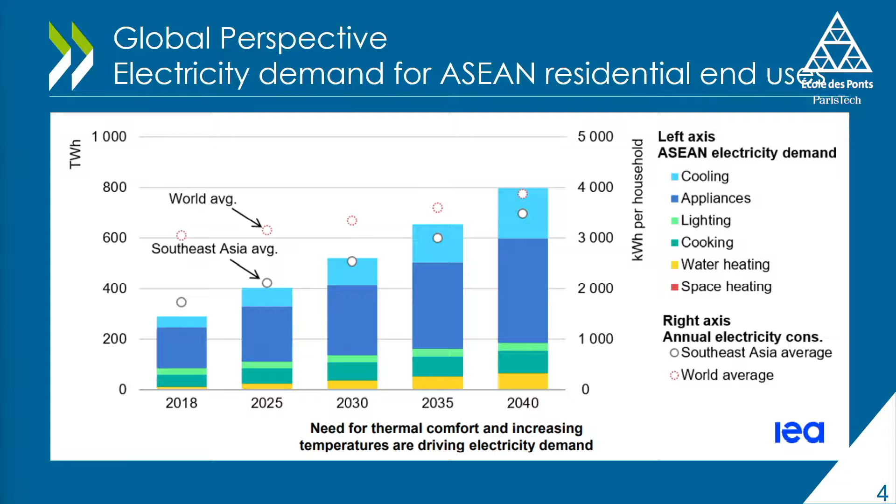So I will start to talk about Japan. This is a quiz, let me ask you a question. This is an international comparison on household energy consumption. This is the United States as the first one — red is heating, blue is air conditioning, green is hot water supply, and else. We have 4 countries here: France, Japan, UK, and Germany. Can you guess which one is France and which is Japan? Maybe — you can see 3 countries are similar, and the last one is quite different, right?

So this is the answer. European countries are similar — most of them use heating a lot. But in Japan, the total amount of consumption is not as large as European countries. You can see the difference between heating and hot water supply: Japan's heating consumption is less than 1/4 of France's, the red one. And for hot water, the green one, Japan has double that of France.

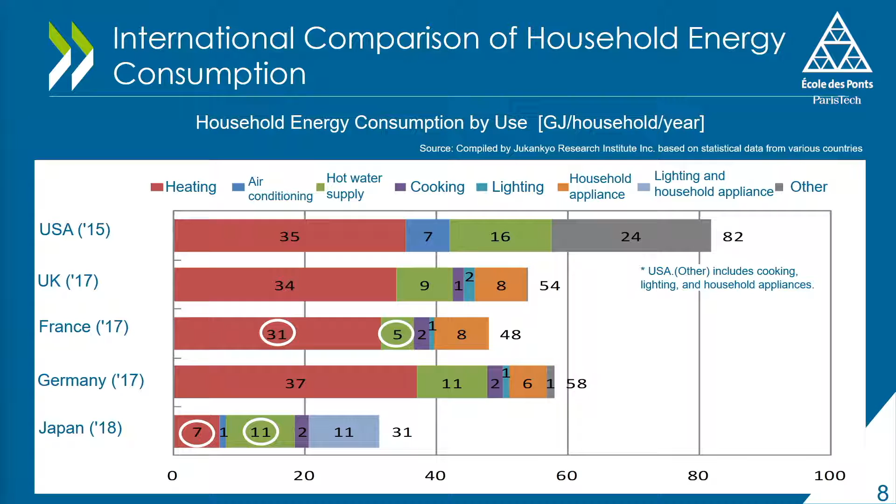Now this graph shows the difference between the regions of Japan. The top one is Hokkaido, the northern part of Japan. It's similar to Paris, so we have more than half of our consumption in heating. They use oil heating, which now we recommend them to switch to air-to-air heat pumps.

In the southernmost part of Japan, Okinawa, you can see they don't have heating. They have no orange, only the blue one, which is cooling, since they have tropical weather. In Kanto, Tokyo, we have heating in winter and cooling in summer, but you can notice the heating, the orange one, is bigger than the blue one, cooling.

Can you guess why? Let's imagine when it's 33 degrees in summer, which nowadays can go to 35, 36, or 37, but usually in Tokyo it's 33 at the highest. So we only reduce 5 degrees, from 33 to 28. But in winter, with 5 degrees, you need to increase temperature by 15 degrees to reach a comfortable temperature of 20 degrees. That's why we need a lot of energy in winter for heating.

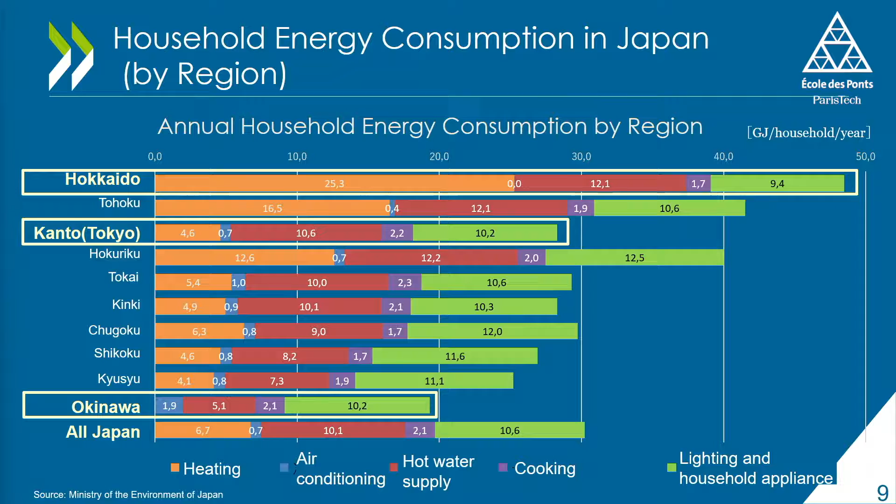As a result, we have different energy efficiency standards in Japan. We divided it into 8 regions, 4 standards. We request thick insulation in Hokkaido, the northern part, but we don't request any insulation in Okinawa's tropical weather. Instead, we request passive design, such as sun shading, in Okinawa. We welcome sunshine in Hokkaido to reduce the demand for heating, whereas we try to cut sunshine in Okinawa to reduce the demand for cooling. So passive design is totally different by region.

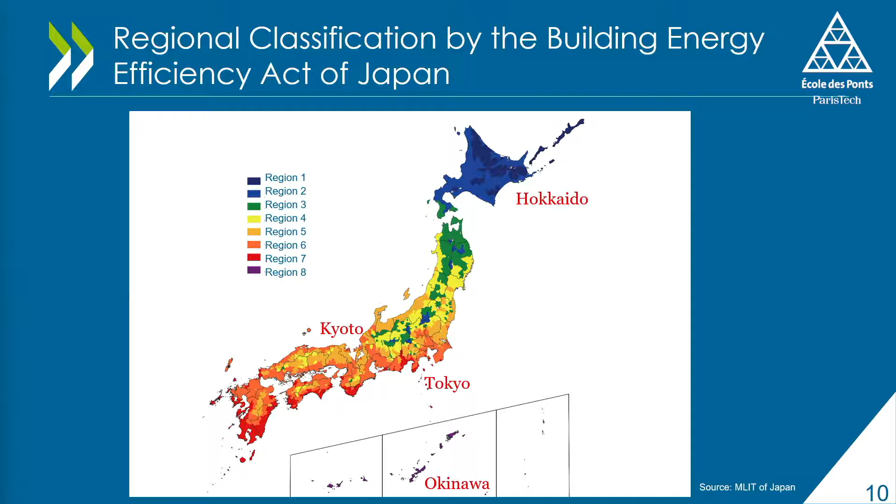So you know what happened? This is a result of poor insulation in the southern part of Japan. In some parts of Japan, the indoor temperature in winter is below 14 degrees. The World Health Organization recommends above 18 degrees for our health, but we have a lot of regions below 18 degrees in winter.

I have a friend in Hokkaido, the northern part, with an insulated home. He sometimes eats ice cream at home wearing a t-shirt in winter. But we don't do that in other regions of Japan, because they don't have insulation.

This is not only the result of the standards, since it's not mandatory for housing in Japan yet. A few decades ago, in the 60s and 70s, traditionally Japanese houses were designed for summer, avoiding high humidity, not designed for winter. Now we want to change it. They have no insulation and no airtightness, since they were built in old days. We know we need to improve this situation. Insulation is important not only for climate change and energy saving, but also for our health.

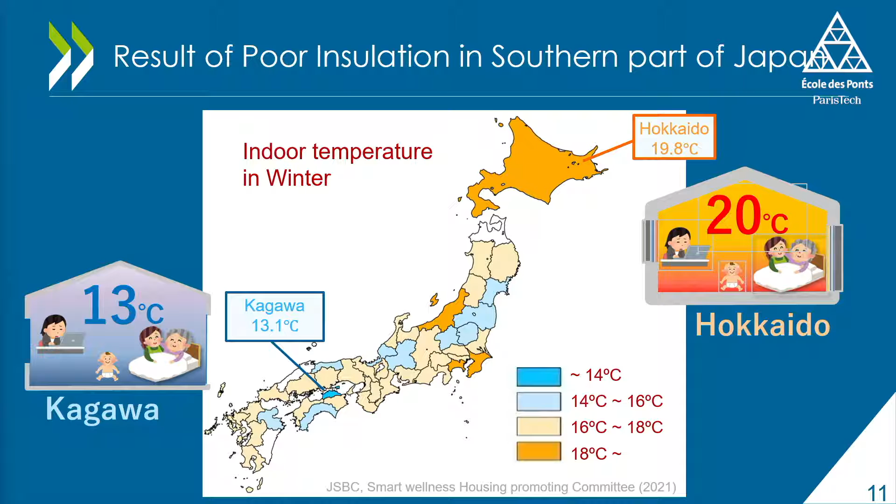Now we have talked about the household sector, so let's compare with other trends and sectors in Japan. This is a trend in final energy consumption. The total proportion of commercial and household sectors was 25% in 1990, but now it's above 30%. When you see the growth rate from 1990 to 2019, the commercial and household sectors are the only ones increasing. So we believe there is huge potential for reduction in the building sectors in Japan.

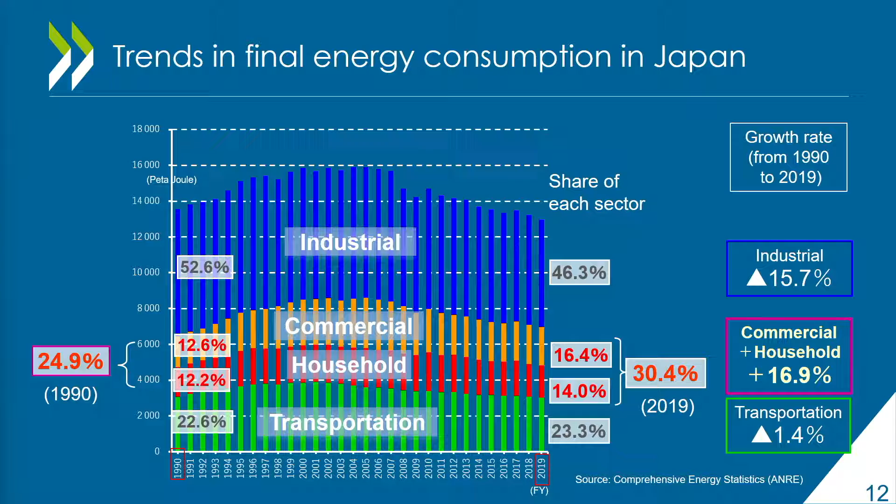So, what are our goals? Japan submitted GHG emission reduction goals as NDC, nationally determined contribution, last October: minus 46% by 2030 and net zero by 2050. But we all know these goals are not enough if we want to achieve the 1.5 degrees as IPCC reported. We need more effort.

Regarding carbon neutral goals by 2050, 785 local government units already committed to carbon neutrality by 2050, which is 40% of the total local governments of 1,800. This is a good sign since local government is a key driver for implementing decarbonized buildings. We need to promote much more cities and regions to commit to carbon neutral by 2050.

So let's go to the next challenges. To achieve the national goals, we need to promote net zero energy houses for the building sector. A net zero energy house in Japan is defined as a house in which energy consumption per year is 0 or less on a net basis. It requires high envelope insulation, high efficiency equipment, and also energy creation.

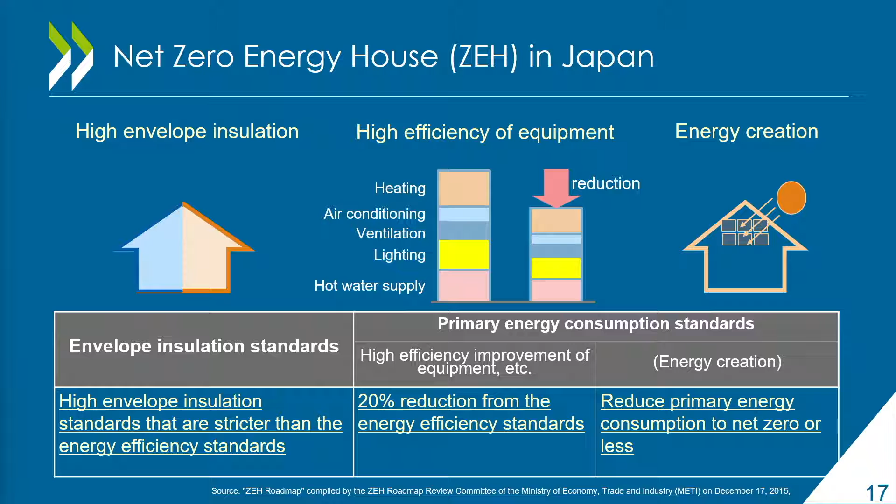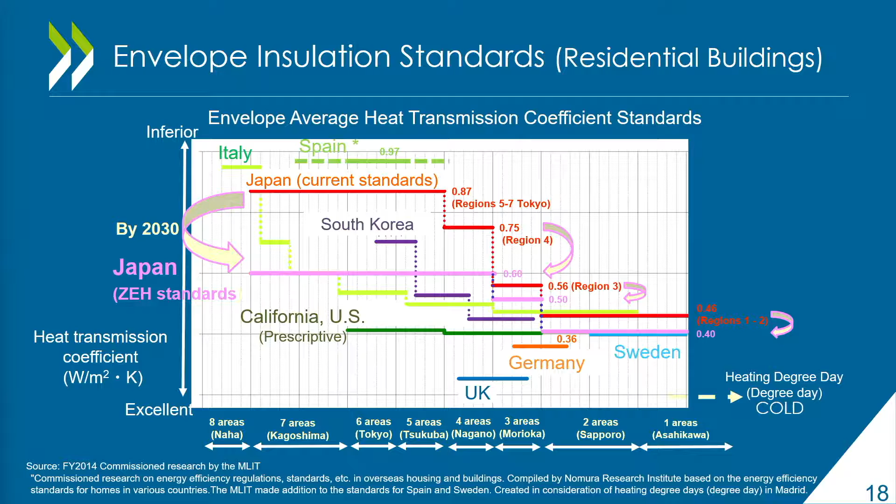We also have a lot of detached small houses in Japan, but each house's consumption is not big. Still, if you sum it up, it will be big.

I'll talk about my experience. Seven years ago, when I was in charge of making a new law to mandate non-residential buildings, there was huge resistance by architects and small construction companies to making it mandatory for residential buildings. So we could only target the non-residential buildings.

But now the situation has totally changed, and it became crucial to make all newly constructed buildings mandatory to achieve our goals by 2030. So we decided to expand the target to all buildings, including detached houses, to comply with the standards.

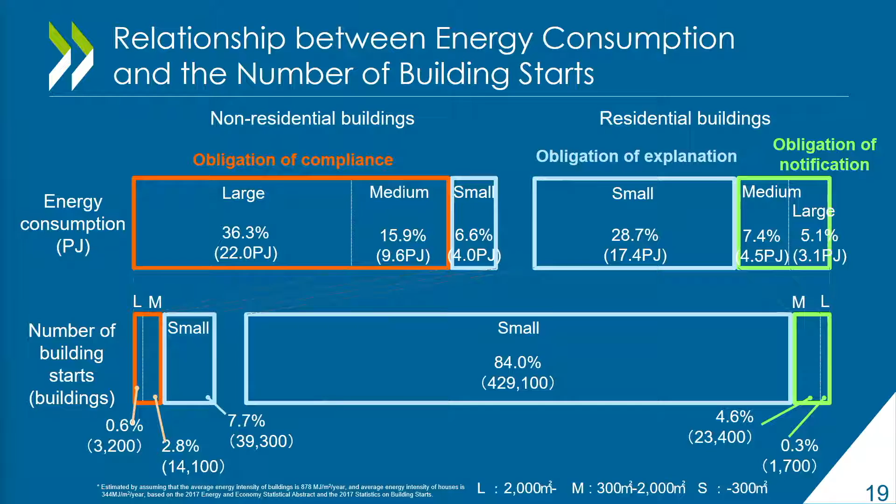For these old buildings without earthquake resistance, it's quite difficult to renovate, so the realistic way is rebuilding, in order to improve seismic performance. But for other buildings constructed in the 80s and 90s, we need to renovate for insulation.

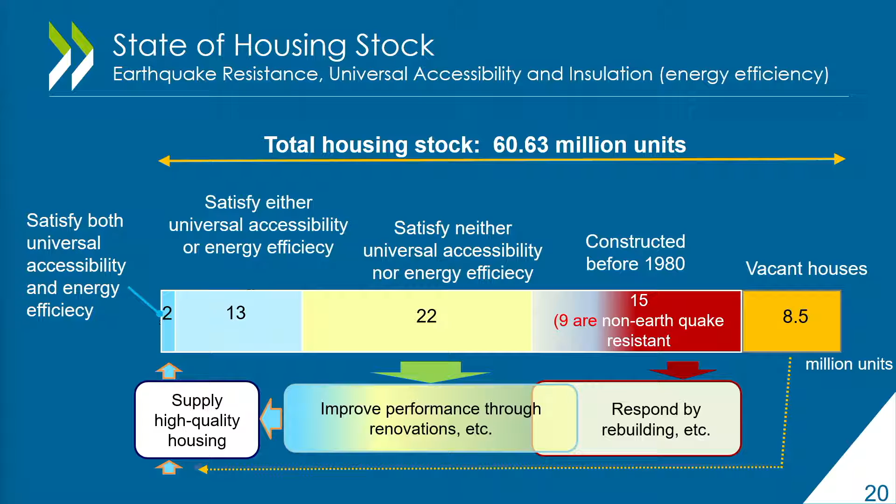So how do we tackle these challenges? I would like to share our strategies and measures.

For newly built buildings, by 2025 the standard will be mandated for homes and small buildings. And by 2030, zero energy building standard for newly built, with PVs to be installed in 60% of newly built detached houses.

We also have a target for the usage of timber. To expand the use of timber as a carbon sink, we will promote efforts to transition to wooden and wood-based construction. Most detached houses in Japan are already wooden, but for non-residential buildings it's not, so we try to make it wooden.

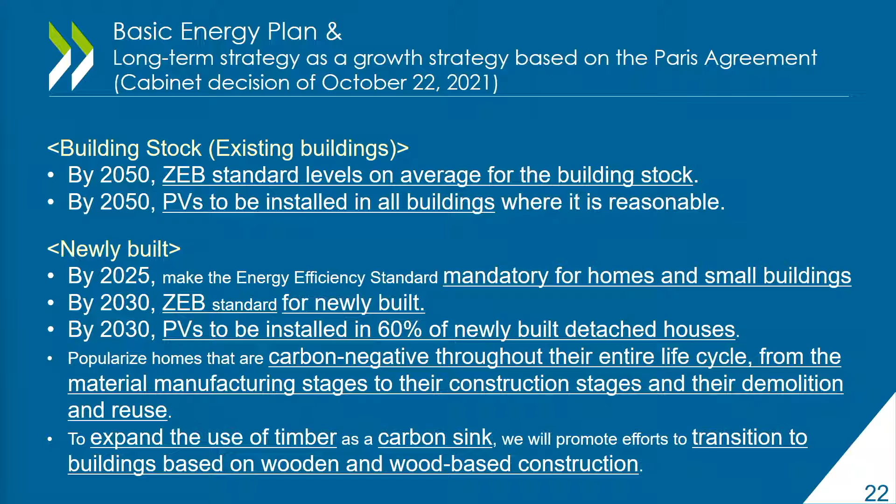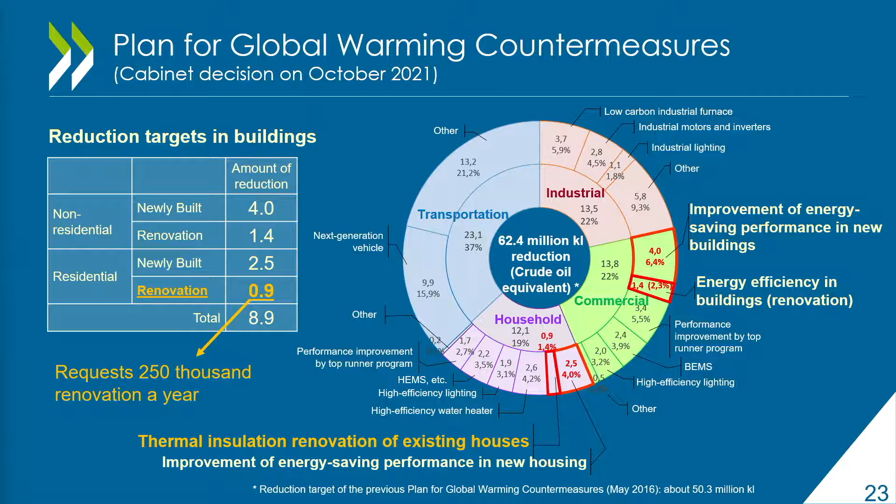The first one is obligation for owners of newly built buildings. We are doing things step by step - we spent years on awareness raising and training local contractors for insulation.

For small buildings, we didn't have any obligation to meet the standards, but we had a unique one: obligation for architects to explain the performance to their clients. That's the obligation placed on the architect.

So I have data that shows 24% of clients who are not interested at first about energy efficiency change their mind to make their homes energy efficient. This happened because they were explained about their performance by architects, because it was obligation for the architects to explain the performance of buildings.

So as we did step by step, finally this year we decided to expand the target buildings to all buildings for the obligation to meet the standards. The second pillar is obligation for sales and lease suppliers to give the information of energy efficiency to consumers. So we have these labeling systems, but it's not obligation to the sales people or lease people yet, but we will make this obligation.

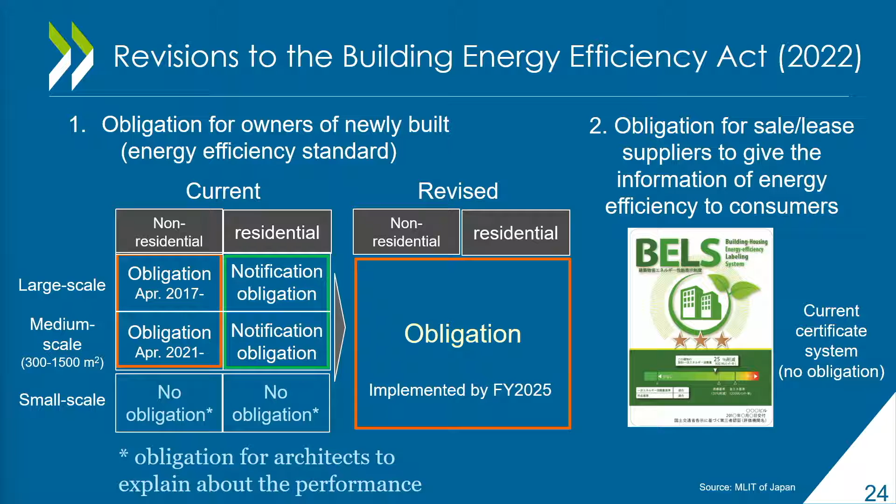The third pillar is renewable energy. So we created a new program this year. Local governments can designate the promoting district for PVs, etc., for renewable energy. In these districts, architects need to explain the effect of introducing renewable energy, such as rooftop solar panels. And also in those areas, you can get the rationalization of form regulation. So building coverage ratio increases when roofed with solar panels.

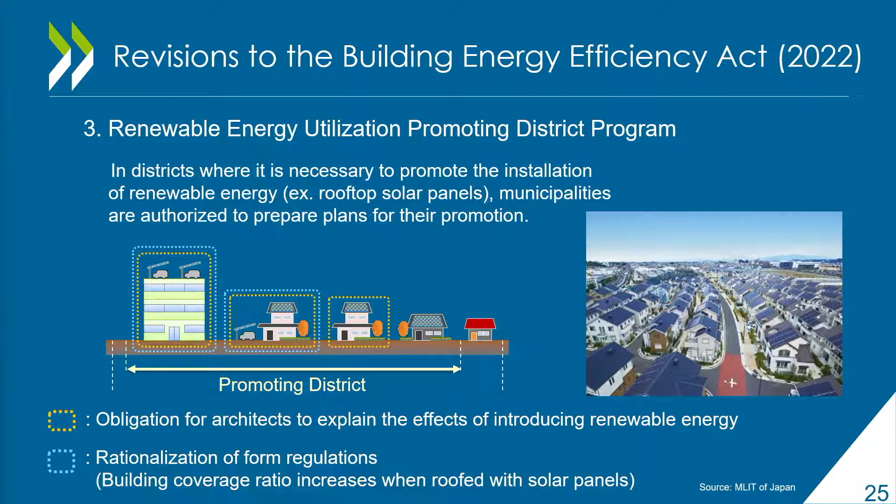So I have talked about recent measures so far. What's next? It's life cycle carbon minus housing. This LCCM housing, as we call it in Japan, achieves negative CO2 emissions throughout the entire life cycle, from construction to demolition and reuse. But in Japan, we have not developed this as a standard or regulation yet, like the European countries. So we need to develop these measures.

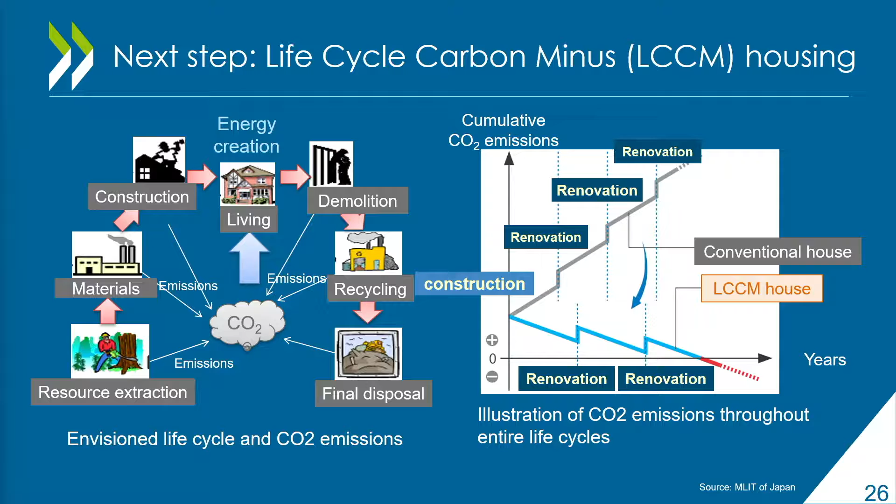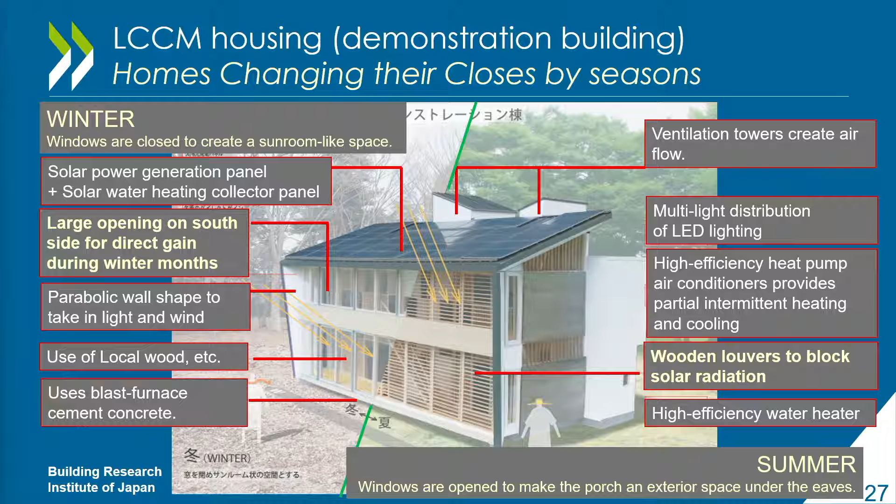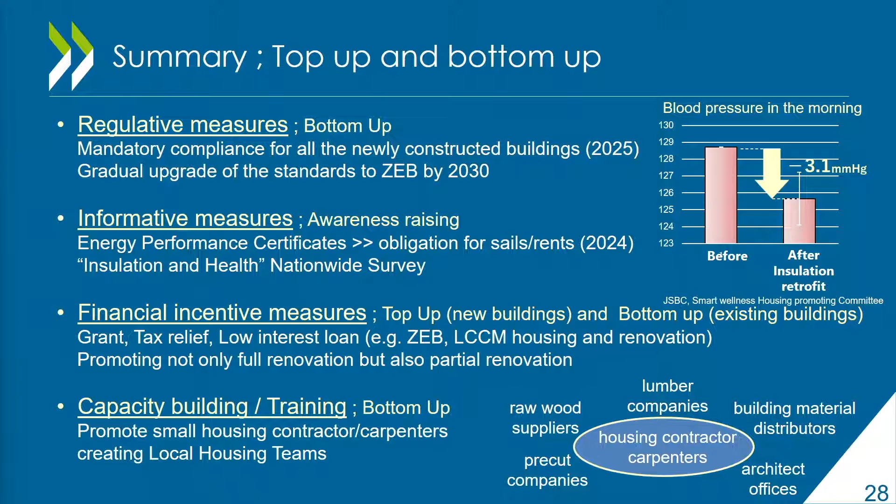So we started to study waterproof housing. One of the major housing companies developed floating waterproof housing. So we are now trying to develop how to estimate this waterproof housing. I really realized the impact of climate change these years. So it's time for action.